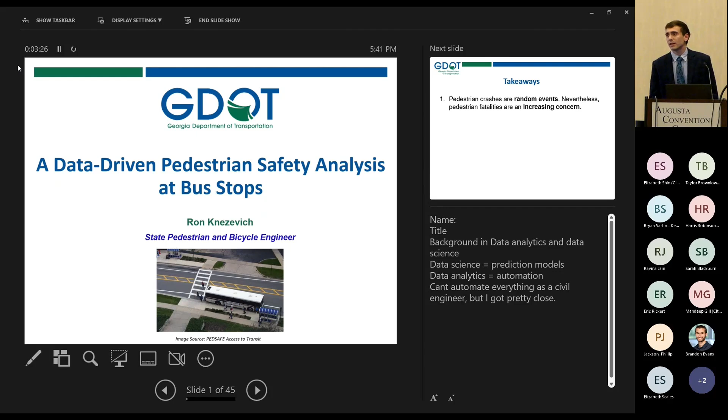All right. So I'm Ron. I'm the State Pedestrian and Bicycle Engineer at the Georgia Department of Transportation. As Raul said, a lot of my background's in data science and data analytics. What that means is I like to build prediction models, and I like to automate things. A lot of civil engineering decisions can't be fully automated. I'm hoping to show you today we can get pretty close to making a good decision. So I'm speaking on a data-driven pedestrian safety analysis at bus stops today.

I have 3 takeaways for you guys. One is pedestrian crashes are inherently random events, but those pedestrian fatalities are an increasing concern. 2 is proactive measures can be used to help justify systemic or network level safety projects. And 3, identifying project focus and the countermeasures you want to implement before conducting a network screening or system-wide approach can help expedite the safety process study.

So first I'll be going through some background. If you've seen some of my presentations in the past, you'll see some reused slides in this background on pedestrian safety, proactive safety, bus stop safety, as well as the safety management process. Then I'll be going through the study conducted on a pedestrian safety analysis for MARTA bus stops. Though this analysis was done with MARTA bus stops, we're hoping to do more with any bus stop network. So send me your data, you'll get a pretty good study coming out.

All right, so first into that background. Over the last 15 years, we have been seeing an increasing proportion of our pedestrian fatalities. Back in 2006, less than 10% of our roadway fatalities involved a pedestrian. That number is closer to 20% today. So if you've been in this industry for about 15 years or longer, pedestrian safety is more of a concern today than it was back then.

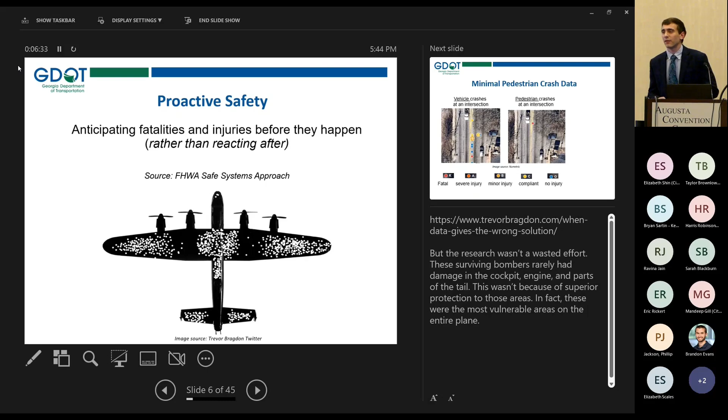So crash data, it's not bullet holes in the plane. There's a lot of holes in that metaphor there, but it's an illustration that we should be using more than just crash data to justify our safety improvements. And the reason for that, especially for those pedestrian and bicycle crashes, is I get an intersection like this all the time. It comes up.

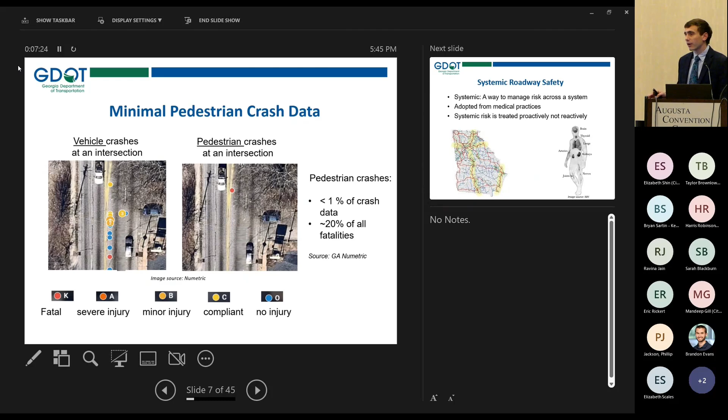You have a lot of vehicular crashes at that intersection. We have a lot of vehicular crash data that the safety program has stored up for years, a very robust database. But what you'll see here is tons of vehicle crashes, one pedestrian crash, and that one pedestrian crash is a fatality. We don't have the best pedestrian crash database. These things are often underreported and not reported. Sometimes people just walk them off. Pedestrian crashes make up less than 1% of all of our crash data, but almost 20% of our fatalities. So if you're only assessing crash data when making a pedestrian safety decision, you're doing it wrong.

Moving to systemic analysis, that often gets used interchangeably with proactive safety, but is not the same. Systemic safety is a way to manage risk across the system. It actually comes from the medical industry. So what you're seeing here is a slide from one of the classes I helped develop at Georgia Tech on systemic safety. So in medical practice, systemic risk is something like diabetes or Alzheimer's, things that affect the body as a whole, rather than an isolated cough or cold targeting a specific organ.

Systemic risk is diagnosed by assessing not just your symptoms or the crash data, but also diagnosing those underlying conditions, your family history, things such as that, or underlying risk factors you as a person may have. This is the same thing with roadway safety. We should not be just assessing the crash data on the roads, but also a variety of other factors such as lane number, traffic volume, intersection skew, etc.

Now onto bus stop safety. Why this study is focused on bus stops: in the Highway Safety Manual, it's identified as a risk factor. If you're familiar with crash modification factors, there's a CMF for bus stops in the Highway Safety Manual. This is because bus stops are locations where people tend to cross the road, whether it's at an intersection or not. So we're trying to make them safer in general.

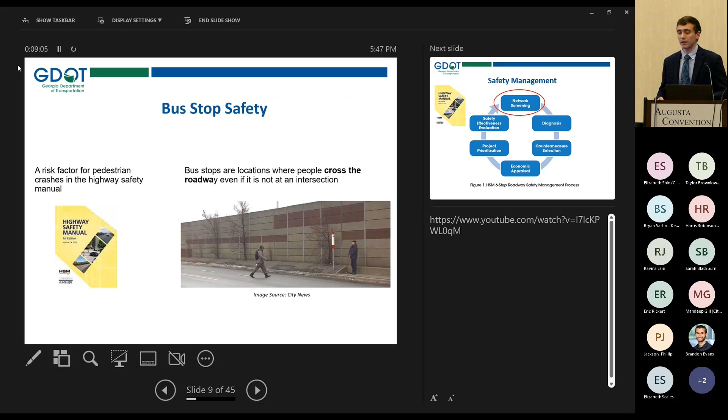Moving on to the highway safety management process. If you're a safety engineer, you should be familiar with this table. It's from the Highway Safety Manual. Our process works by conducting a network screening, finding those locations to implement safety projects, then diagnosing what that safety concern is, selecting a countermeasure, conducting an economic analysis, project prioritization, and then evaluating how you did.

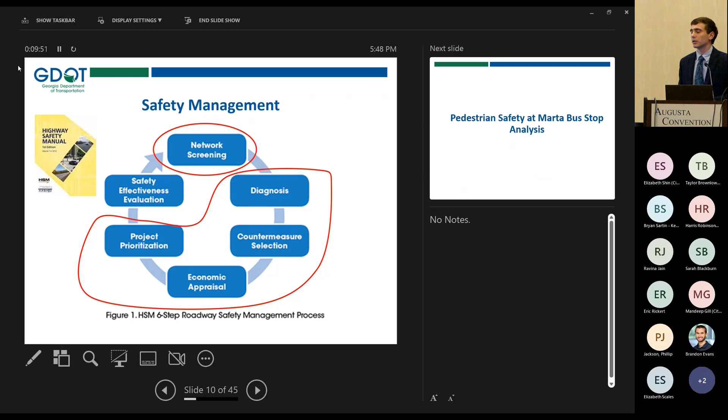Today, I'll be going through morphing all those circled in red into that network screening level. So preliminary network screening that conducts the diagnosis, countermeasures, economic analysis, and project prioritization. Very preliminary versions of all of those, but it gives us a good starting point. All right, now moving on to the study on pedestrian safety at MARTA bus stops. And as I said earlier, with this study, hopefully we can move on to other types of bus stop networks.

So first, establishing focus. When conducting a network screening, you want to isolate a crash type, a certain type of safety concern. Here we're doing bus stops, pedestrian crashes, or pedestrian safety in general, and mid-block or unsignalized intersections. For signalized intersections, we could have a whole project there as well, but that's a completely different type of countermeasure that you would implement than a mid-block crossing. So you really want two different types of projects, because what you're going to do to a signalized intersection is not the same as what you would do to a mid-block.

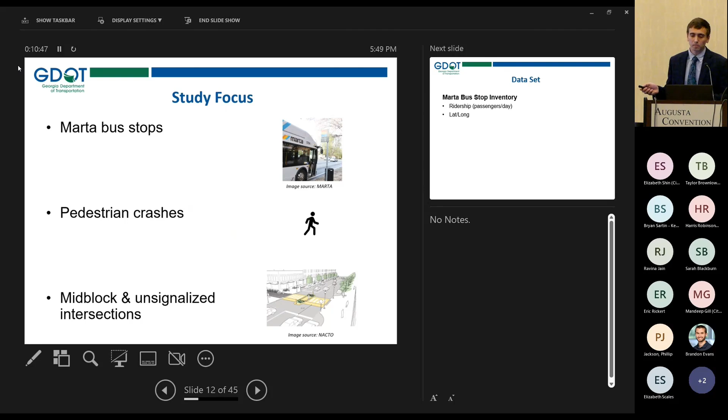All right, now into the data sets. For our MARTA bus stop data, what I used was the location as well as the ridership, or vehicles per day, or passengers per day.

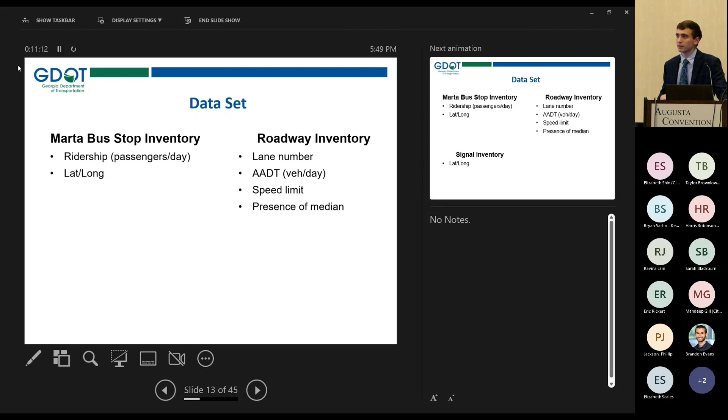The roadway inventory, GDOT has a robust data set of all of our roadway networks with lane number, traffic volume, speed limit, as well as the presence of a median or divided roadway. And the signal inventory, just so I could get rid of those bus stops that were at signal locations.

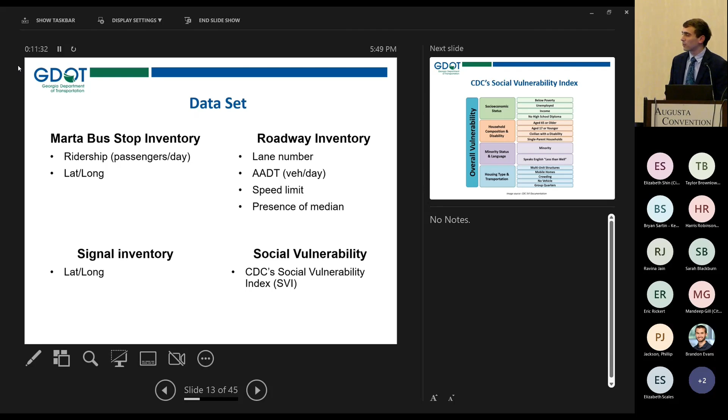And social vulnerability, or CDC's SVI, Social Vulnerability Index. If you've seen one of my presentations before, I bring this one up all the time. The CDC social vulnerability is an indicator of vulnerability of that population. It takes into account a variety of different demographic data, such as age, income level, race, and what was used particularly in this study is housing type and transportation. What this is, is access to transportation of those roadway users.

This one was particularly influential in the model discussed today because if you have lack of access to good transportation, you're probably using those MARTA bus stops or you're walking around. So this becomes a risk factor even more at these bus stops.

Now, how do we quantify that proactive safety? As a safety engineer, we want to quantify all of our decisions. We need a dollar value associated to everything. So that's where crash prediction comes in.

So I said earlier, I'm a data scientist. I love building prediction models. I'll build prediction models for all the regions here in the state. This is a pedestrian safety performance function, which is the term typically used. It's essentially an equation that combines a variety of risk factors and demographic data to predict pedestrian crashes.

The risk factors we're seeing here are ridership, those passengers per day, and the presence of an intersection. GDOT actually has a robust data set now, very recently developed on our platform Numetric, of the locations of all of our intersections in the state. It's not perfect. In Savannah, actually, a lot of those intersections are fairly close together, and it's a data challenge to separate out an intersection when they're only a couple of feet apart.

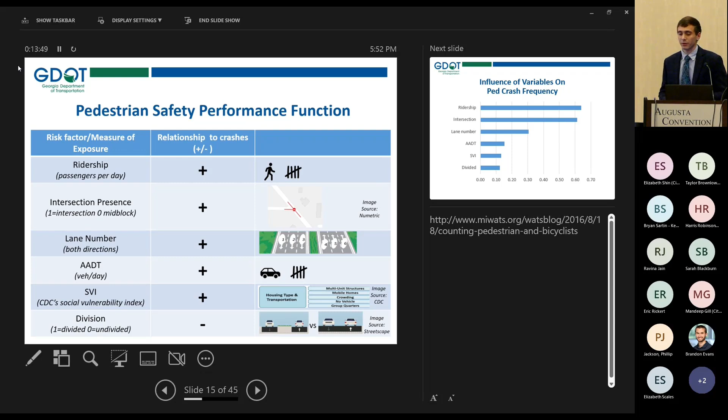Lane number, more lanes, more crashes. Traffic volume, higher traffic volume roadways, we're predicting more crashes. That social vulnerability, those more vulnerable populations are the locations where we have more pedestrian crashes. And roadway division, undivided roadways have more pedestrian crashes, or lack of a median.

All those variables are not influencing that equation or the model the same way. Ridership is the most influential variable, as it's a measure of exposure of how many pedestrians are actually walking by that bus stop per day. Then the presence of an intersection, more people are tending to cross at those intersections. Lane number, then followed by traffic volume, then social vulnerability, and then roadway division.

So what I went through was an equation on predicting crashes. I have an actual formula for that equation. It's a little too technical for this presentation today, though. But aside from predicting crashes, we want to predict crash severity too, which is a very different thing.

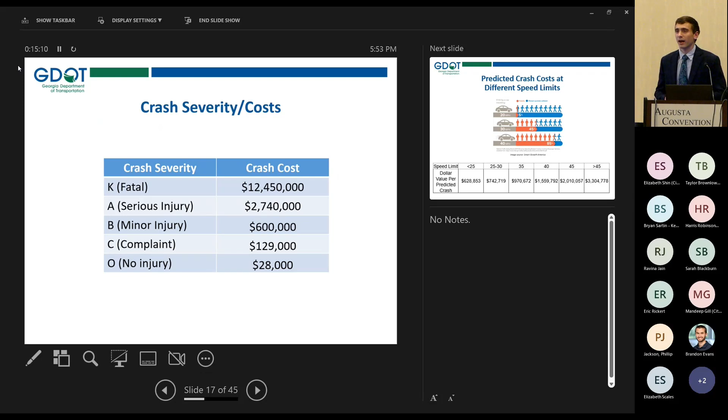GDOT has these various crash costs for all of our different severity levels of crashes. These have been updated for adjustments in inflation, so you might be using older crash costs. Just like our construction costs have gone up in the last couple of years, so have our crash costs. So if you've ever wondered what the value of a human life is in traffic engineering, it's about $12.5 million. This is how we quantify where to put different safety projects.

So on our various roadways, though, higher speed roadways have more severe pedestrian crashes. We're not seeing more pedestrian crashes on our higher speed roadways, but those crashes that happen are much more severe. So what this table shows is that the higher the speed roadway, the higher that dollar value is for those pedestrian crashes, and this is derived from our own data.

Over 45 mile per hour roadways, we have a dollar value of about 3 million, while under 25 mile per hour roadways, those pedestrian crashes are only worth about 600,000.

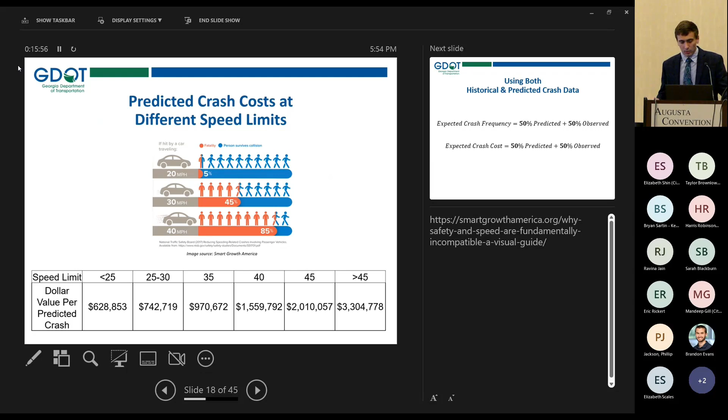So we just predicted crashes, we predicted severity. Moving on to combining that data with our observed crash history. Highway safety engineers use a term called expected crash frequency. There's a lot of methods in the highway safety manual on how to calculate that. But what we're recommending at this point in time is to weigh 50% predicted crashes from that risk-based model, as well as 50% just from what's actually going on the roadway.

What are those pedestrian crashes actually there? So you can gauge both proactively and reactively, so we're not just ignoring locations where crashes are happening. Same thing with crash costs as well, predicting both crashes and crash cost.

That was my prediction model. Now moving on to the treatment selection.

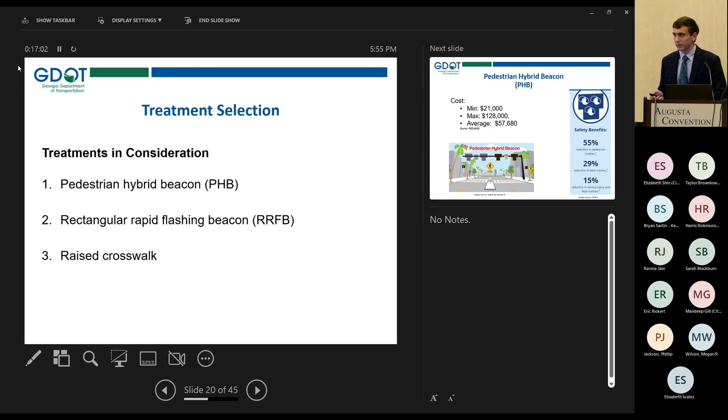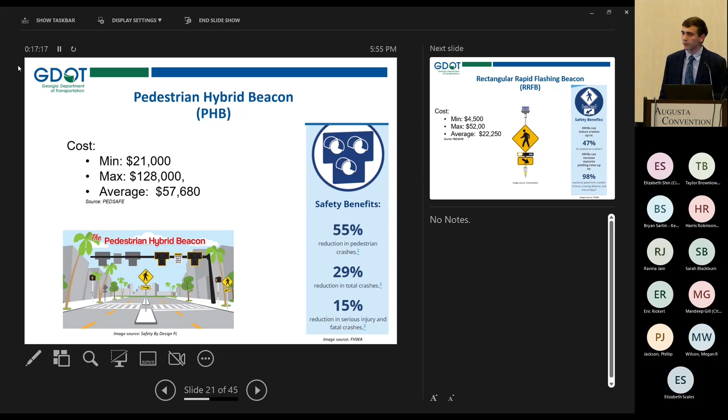Three types of countermeasures were used in the study to be implemented on this network level: pedestrian hybrid beacons, rectangular rapid flashing beacons (RRFBs), and a raised crosswalk. Pedestrian hybrid beacons have a crash reduction for pedestrians of about 55%, but they also reduce vehicle crashes too. Their cost is approximately $60,000, a little higher including professional engineering.

Rectangular rapid flashing beacons reduce crashes a little bit less, but they're a cheaper countermeasure. They also have a very high increase in yielding rates, about 98% increase in the amount of vehicles that yield to pedestrians at crosswalks.

Then we have a raised crosswalk, a cheaper countermeasure in most scenarios, with a 45% reduction in pedestrian crashes. But what's different about this is it's not applicable on all types of roadways. These three countermeasures are not always applicable.

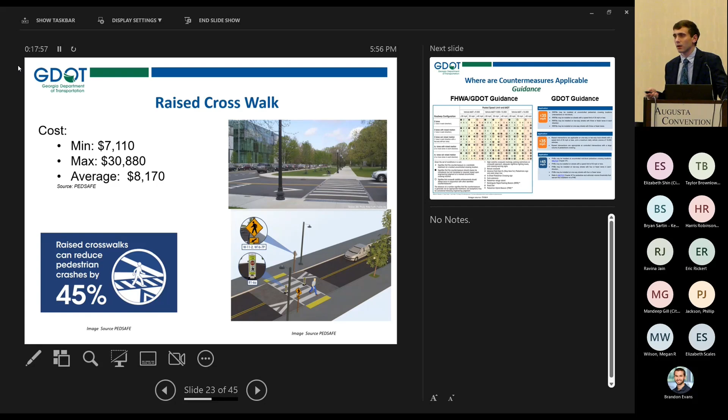We have guidance from FHWA, guidance from GDOT in our pedestrian streetscape guide on where we should be putting these types of countermeasures. We also have guidance from the MUTCD. Yes, I say guidance from the MUTCD, not warrants. That is the biggest comment I give in my traffic engineering studies. There is no PHB warrant, it is PHB guidance.

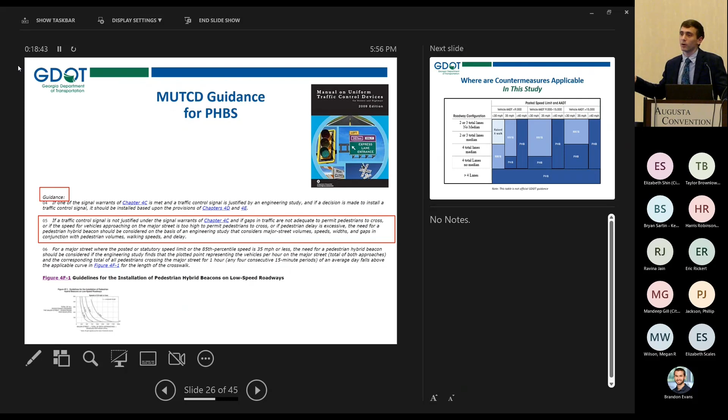What is often referenced is only the volume warrants, vehicle volume versus pedestrian volume. It is not a warrant, first of all, it's guidance. There's also another section of that guidance on safety, just as important as those volumes. You should be considering safety for what type of crossing you're recommending, not just volumes when programming PHBs or RRFBs. What it says in the MUTCD is consider gaps for those pedestrians, the speed of the roadway, the crossing distance, etc. That goes back to our table in the pedestrian streetscape guide and our guidance provided there.

Using all of that guidance, I formulated this table here just for the purposes of this study. The tables in our guidance are a little bit more flexible. This one gives a conservative decision on what the best type of countermeasure should be. So you see, as lane number goes up, as traffic volume goes up, and as speed goes up, we're implementing a more expensive countermeasure that's going to reduce crashes more effectively. Those pedestrian hybrid beacons are going to be the most visible on a higher speed roadway. You can see a raised crosswalk is only applicable on those low volume, low speed, low lane number roadways.

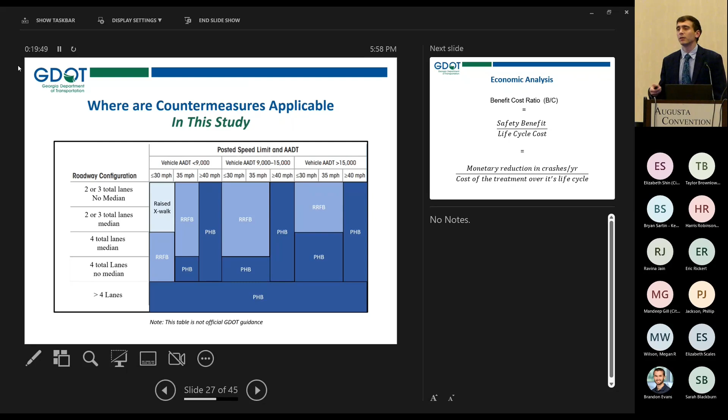All right, so now we've decided what type of countermeasures we're implementing. Economic analysis, or our benefit cost ratio, is how we do economic analysis in the safety program at GDOT. If you're a roadway designer in this meeting and you don't know what a benefit cost ratio is for safety, if you're working on a safety project, this should be calculated.

If we go below a BC of 1, or often below a BC of 2, we lose funding for that project. So you need to be recalculating that benefit cost ratio if you're changing project costs, because that will end the project entirely if you make it too expensive, which happens quite often.

That is the safety benefit over the life cycle cost of a project, which is the monetary reduction in crashes per year. Those crash costs I gave, multiplied by the crash reduction factor, over the cost of that treatment over its life cycle. So not just the cost, but some treatments last for 20 years, some last for 10 years. I can provide equations for this, they're actually in slides at the end later, with more formulas for how to calculate that BC ratio.

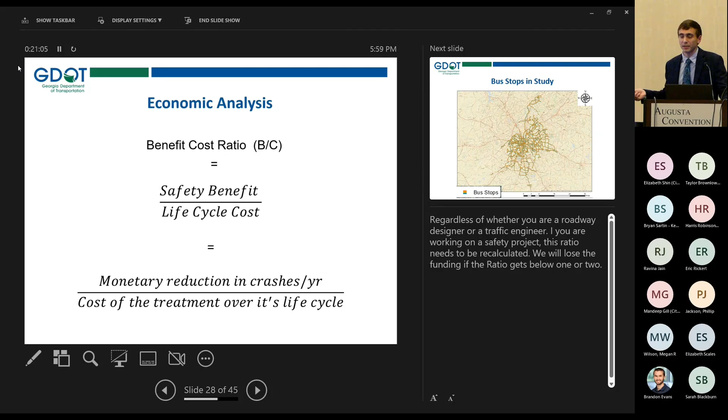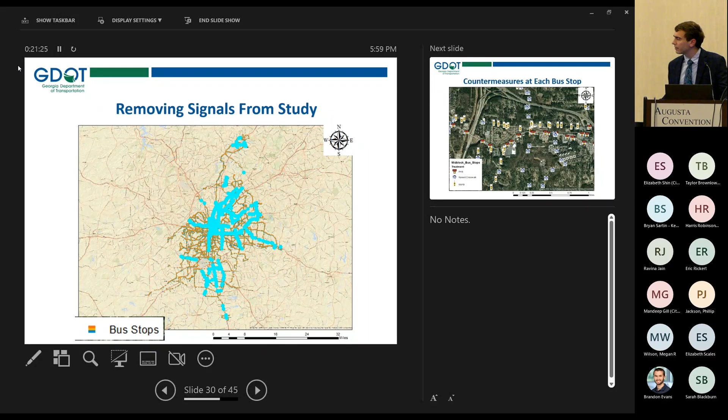All right, now to some of the good stuff: the bus stop study actually conducted. So as I said, we started with all the MARTA bus stops, removed the signalized ones, the bus stops at signals - still working on getting a better signalized database. I noticed we were missing some.

And then recommending that countermeasure at all of them. So this is not where we're actually proposing a project, this is what was recommended from that table I proposed. So what you'll see is on those higher speed, higher volume roadways, we're seeing PHBs, we're seeing RRFBs on those minor arterials, and raised crosswalks on those side streets.

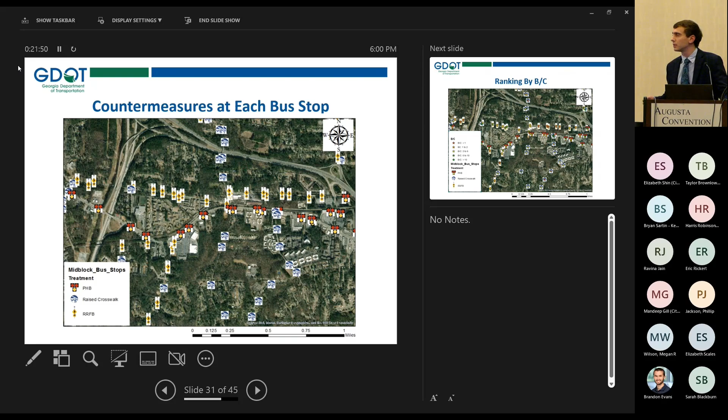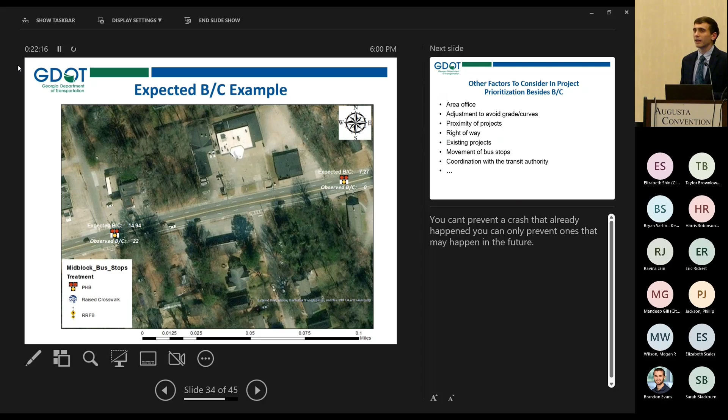We can rank those by the benefit cost ratio to try and narrow our scope, and filter to just the ones where we have a very high benefit cost ratio. In the safety program, we have to prioritize our funding just in those locations where we get that highest benefit cost ratio. To show an example, we're not using an observed benefit cost ratio, we're calculating this expected benefit cost ratio, which is a proactive ratio.

I see two intersections here. Don't get too hung up on the locations of these two crossings. These are just two bus stops, but they're about 400 feet apart. What you're seeing is one where, if we were to use our historical benefit cost ratio with only the crash data, we have a 0. But once we use that predictive approach and the proactive measures, we now have an economically feasible project of around 7.

In the other crossing, we see an observed benefit cost ratio of 22, meaning there was some crash data here. Then a pedestrian hybrid beacon was justified, but it lowered a bit to about 14 or 15, as you're seeing there. So what that proactive approach is doing, and that systemic approach, is kind of spreading out that benefit cost ratio, not just at locations where the crashes are happening, but where they could happen.

We're not trying to prevent crashes that already happened. We're trying to prevent crashes that will happen in the future. We're trying to prevent ones that could happen. And that location right next to it, with all the same risk factors, is nearly as likely to have a crash in the future.

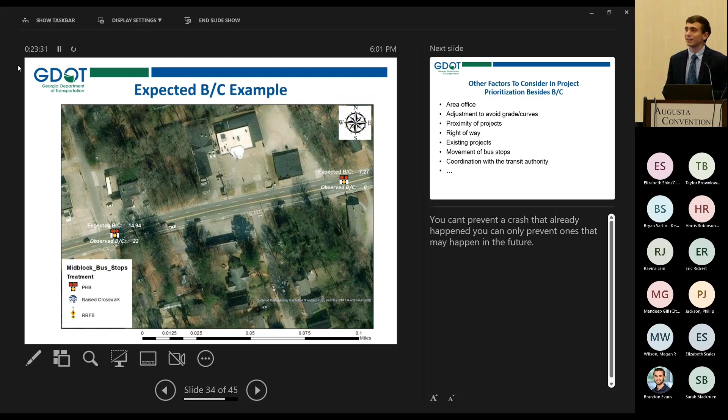So I went through that whole approach. There's a lot more to consider. We're still working on narrowing down what projects we're actually going to implement. There's things like, how do we group these projects by area office? We want to avoid curvature or grade. We want to combine projects based on proximity. Consider right-of-way — do some projects where we don't have to purchase right-of-way, because that can be a lot quicker process, and some projects where we do have to purchase right-of-way. We want to move some of the bus stops, and of course we'll want to talk and coordinate with MARTA on this project, as well as any other transit authority.

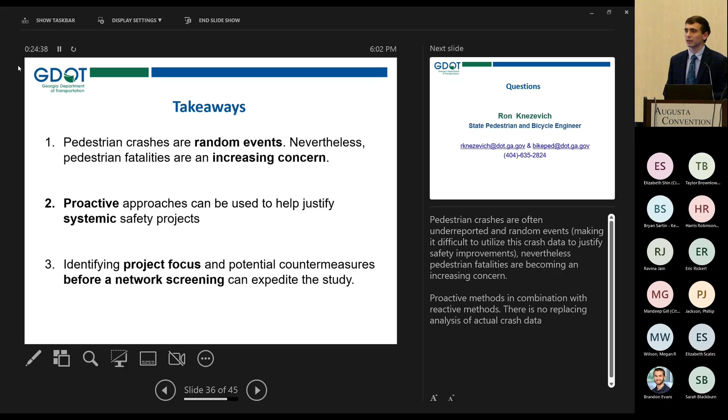So again, my three takeaways: pedestrian crashes are inherently random events, but nevertheless those fatalities are an increasing concern. Proactive approaches, as shown today, can be used to help justify a systemic safety project, and identifying that project focus and potential countermeasures before a network screening can help expedite that process and make a quicker selection of those countermeasures from the get-go. So thank you very much.

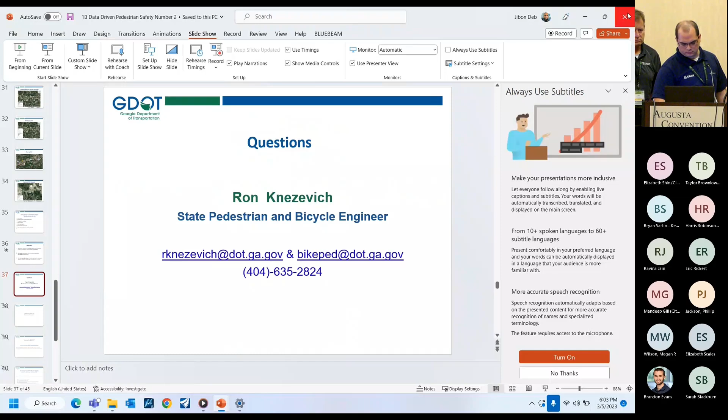All right, appreciate everybody hanging out with us tonight. I know Eric and I are in between dinner and a few cocktails here in a bit, so we're running late, so we'll try to go as quick as we can.

As mentioned, my name is Chris Rideout. This is Eric Brisse. We're with Croy Engineering. We're going to talk about the Windy Hill project today. Real fast, always got to talk about Croy for a second — about 120 people, based out of Marietta, Georgia. We also have offices in Chattanooga and Huntsville, Alabama. Been around for about 18 years, so good while now. We do everything — transportation, traffic, survey, land acquisition, aviation — so we do a little bit of everything.

So we're going to talk about Windy Hill today, and we're going to talk about connectivity, constructability, cost, and utilities. And it's all going to come back to this: it's a major project through Smyrna. But the goal is to get the vehicles through while keeping the pedestrians and bicyclists, and getting them more connected than they ever have been.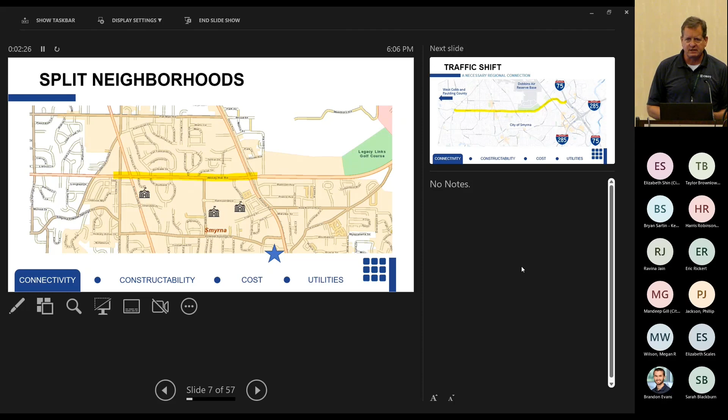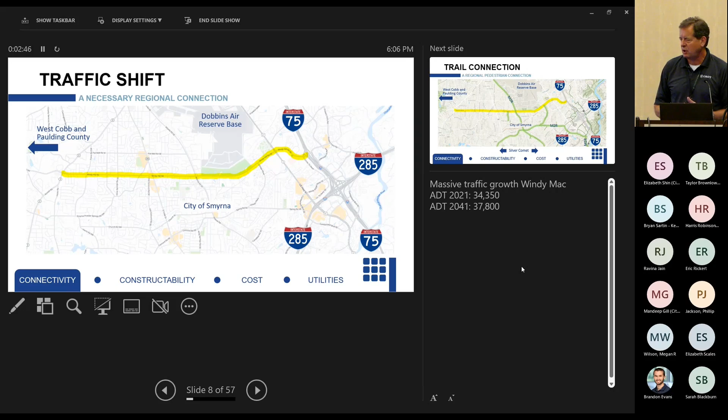The city really wanted to do something to improve it. Overall, it's the big picture. Windy Hill basically goes from Austell Road to I-75. It's a long corridor, a little over 5 miles long. Trying to improve the whole thing is hard to do funding-wise. So the city looked at, and sorry, forgot this little piece.

We're also working to connect all the trails in the area from the Mountain to River Trail. There's Village Parkway Trail, and all that connects to the Silver Comet Trail to the south. So this project will help improve all of that.

Like I mentioned, the original project was a very large scale, multi-phase project. We originally went after some funding from the state, but it's not a state route, so that was a no-go. Eventually the city of Smyrna stepped up. They funded pretty much half the project, with Cobb County funding the other half through the Cobb County SPLOST program.

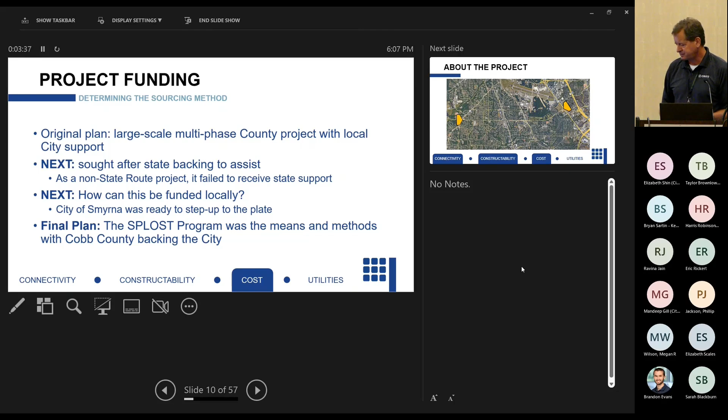Here's the original corridor that's been looked at, from I-75 all the way to Austell Road. And then this is our section right here, basically from South Cobb Drive to Atlanta Road.

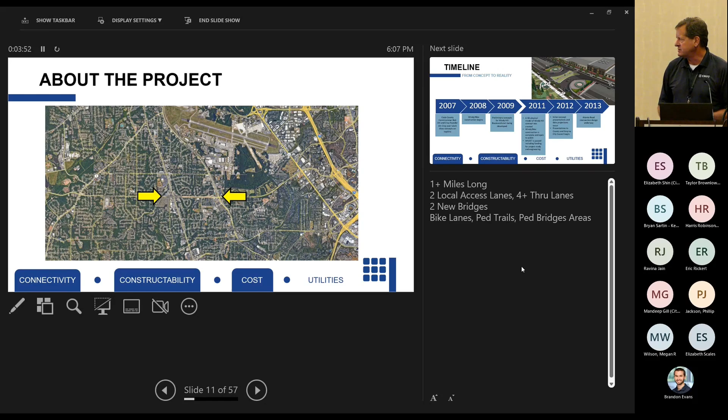I'm not going to bore you with the overall timeline, but one thing I wanted to point out is the project's been going on for a while. Back in 2007, our founder Mr. Croy sat down with one of the commissioners, Bob Ott, on the back of a napkin and said, hey, we know there are projects coming that are going to make Windy Hill even more congested. What can we do? One of those big projects was the Windy Mac project. If you're familiar with West Cobb, you're very familiar with this project. It started construction in 2009, opened I think in 2011 or '12.

It basically took all of Paulding County, West Cobb, put them on Windy Hill Road, and it made what was already bad congestion twice as much. I think the design year number we're dealing with is 37,000 ADT. So, like I said, it started in 2007. Here in 2023, we're halfway through construction. We'll get to see a little bit of that in a minute.

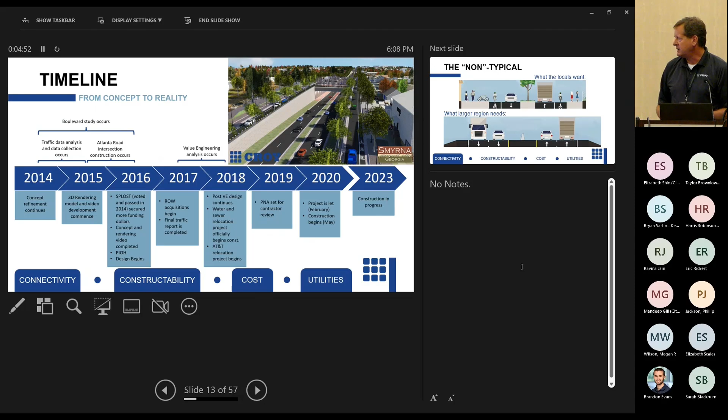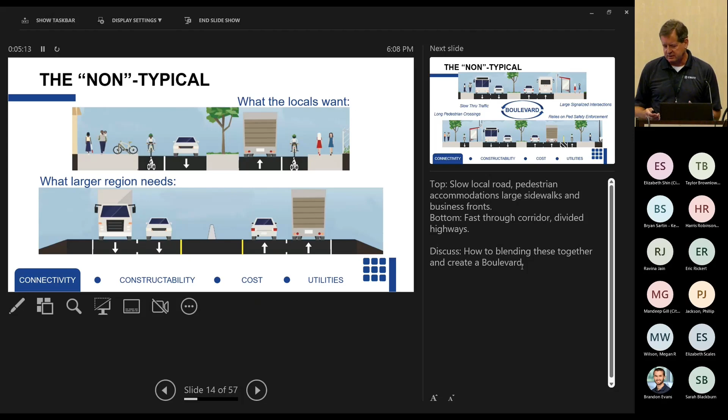So what was our goal here? Our goal is to move the vehicles through Smyrna efficiently while maintaining and adding to our pedestrian and bicycle, family so to speak. The citizens want bike lanes, wide sidewalks, and areas for BRT and whatnot. The challenge with getting all that in is that you really slow down traffic with your crosswalks, the long pedestrian crossings, and the signalized timing and that kind of stuff. So we really tried to come up with a mix that would solve all of those issues.

So we started thinking outside the box. What you see here is a roundabout sitting on top of express lanes in Barcelona, Spain. That was kind of our initial inspiration for this project. It's not something you would normally see, but we're starting to see more of them in the region and the nation. This was one of our first concepts in the project. The goal is to move the traffic while also keeping the pedestrians and bicyclists happy, connected between the north and south of Windy Hill Road.

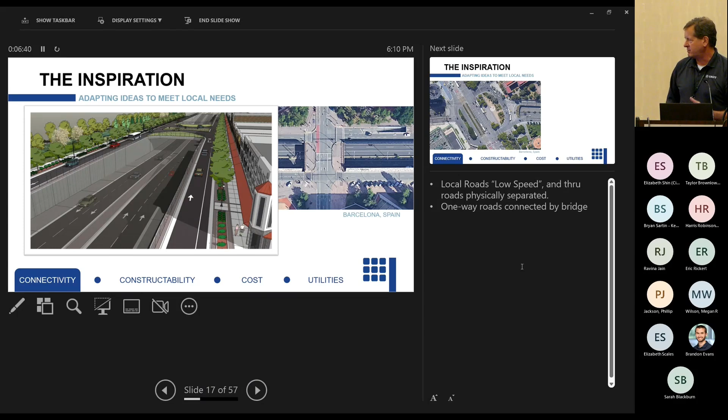This is another picture of that same roadway. You can see the bridge structures going over the express lanes, one-way road in each direction. This is one of our original SketchUps, which shows what we visualized for Windy Hill, even with some development on the south side.

This is another one where if you zoom in, this is almost identical to what we're going to end up with when our project is complete. We have one-way traffic with turnarounds and with the express lanes going underneath. So once again, we're trying to keep those pedestrians in mind at every step of the way in this project.

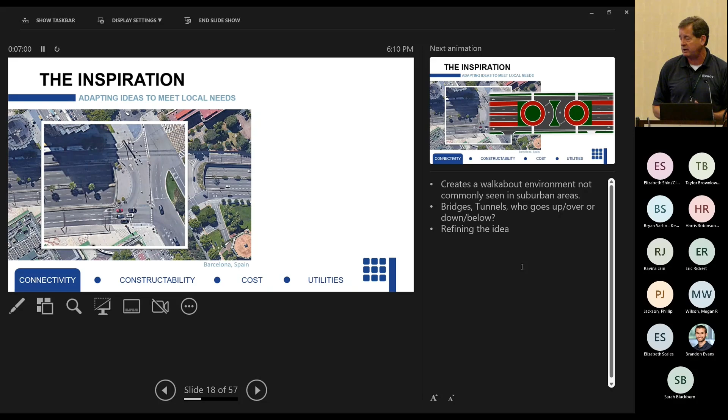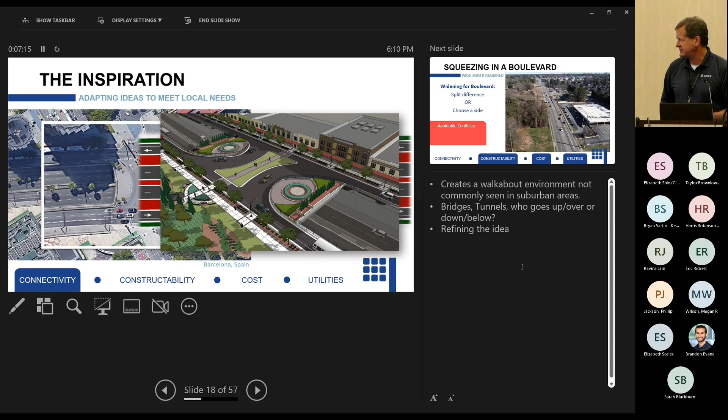Once again, there's our concept. This is where we started getting into some renderings. At this point, we've got the ideas, and then we're trying to figure out how to really express those ideas. We had some challenges on this project. We've got a 5-lane section, heavy commercial. So where do you put the road?

Turns out we also have a post office on the south side. We know what it's like to touch a federal building, so that was a no-go. We also have transmission lines along the south side, and we know how expensive those are to move. So going to the south was not an option.

There's also a barbecue joint that we were told no, do not touch. So it made the whole decision to go north easy. When I say easy, it wasn't easy, but that was an obvious decision. So you can see here, this is one of our original concepts where we show everything shifting to the north.

One of the advantages of what we've come up with is we've got 2 lanes, 1 lane each direction for the local access. And then we allow them at numerous locations to do turnarounds. So no matter where you are, once you get on the local access in either direction, you have an opportunity to get anywhere you want along this corridor. You just go up and we've got 2 bridges, they're almost like roundabouts, perfect U-turn movements, and everything accommodates both bicycles and pedestrians.

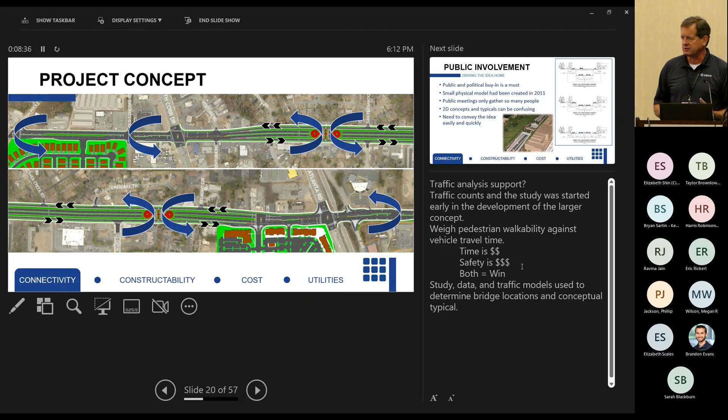This is where the public involvement, this is where we really had to get buy-in. This is a massive project for the city of Smyrna, the largest one they've ever undertaken. So we really had to get buy-in from the public. So we had numerous public meetings. We created a model, an actual replica of the project, that we carried around in the back of our car to all these public meetings. It was a 3D scale model of the project.

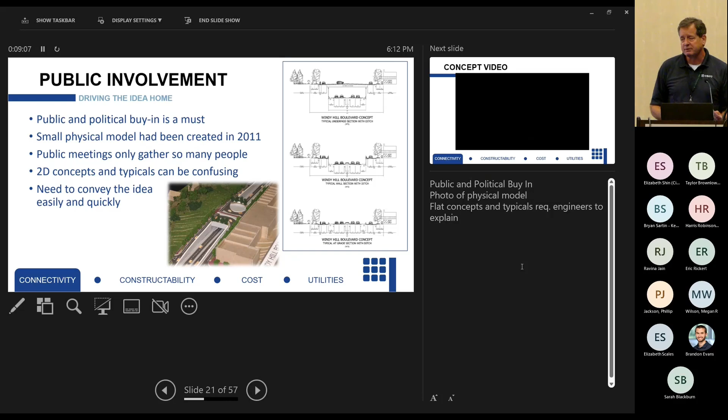But even that, it helped, but you had to keep going a little bit further. So we created a 3D rendering of the project, and we were able to film it or render it. This is where Eric's going to come in. So what we did is we presented this on a loop at all our public meetings. I'm going to show it real briefly, and I'm going to let Eric get into a little bit of the detail of the overall project and the design. We did this 7 years ago, give or take.

Yep. So here we're heading eastbound on Windy Hill, coming across South Cobb Drive. And if you know the area, you drop down. And if you want to go on the local access, you pull off to the right. You've got access to the barbecue joint right there. Moving on, and this is what we call our West Bridge. So you see the local express lanes going underneath, and then you've got the local access above. Those are pedestrian parks, crossovers, and some other cool features that Eric's going to mention.

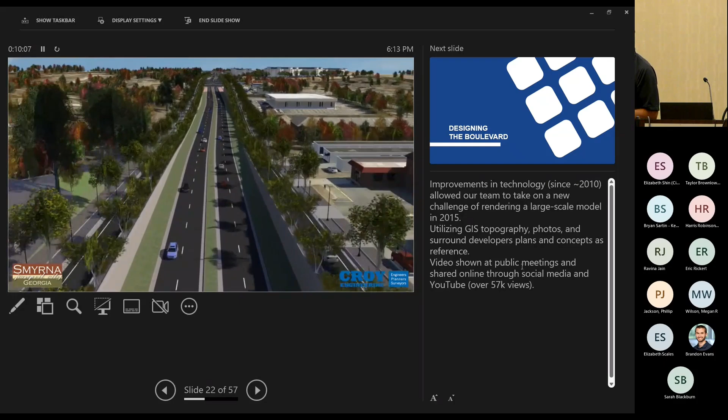We kept this on a loop during the public meeting. Sorry, I stepped away from the podium.

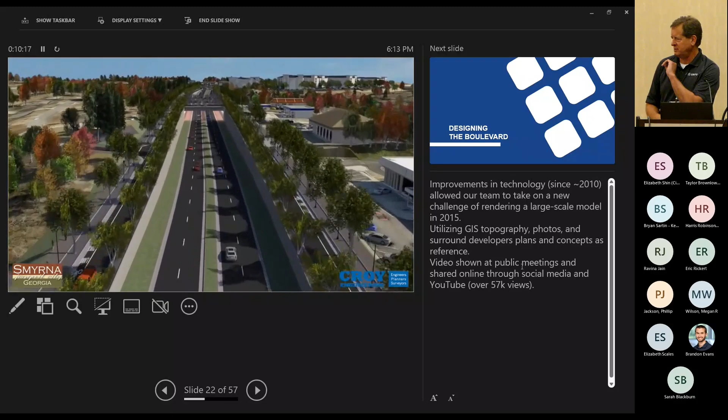And this was huge. When the public saw this, they could really envision it. This is exactly what is being built today, with a few exceptions. So this was huge. I know this was 7 years ago, and with technology now, we've all seen even more incredible renderings like this out there. So these buildings, this is exactly what's out there right now, building-wise.

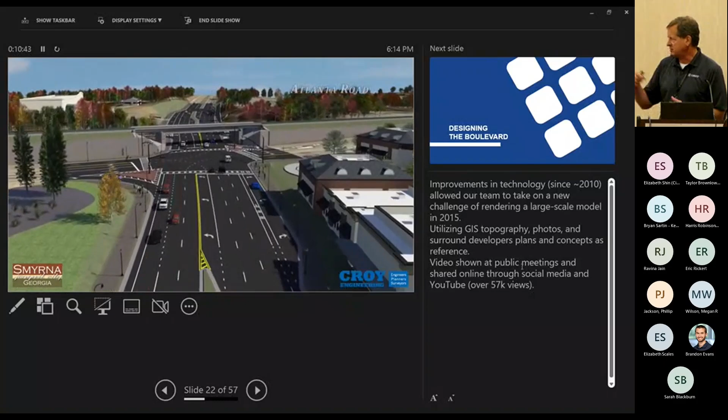Parks on the north side. That's Atlanta Road and the railroad right there. So that was huge in getting the point across to the public so they could visualize what was happening. So that's my spiel. I'm gonna let Eric talk a little bit about how we got to where we are today.

Thank you, Chris. Some of the other parts of that video that we cut out for time today had a first person view of the vehicle going down the through lanes. That way people understood, all right, this is how I'm going to connect here. We also follow along a vehicle on the local access roads and give them a little view of what it'll be like when they actually make the U-turns on the bridges.

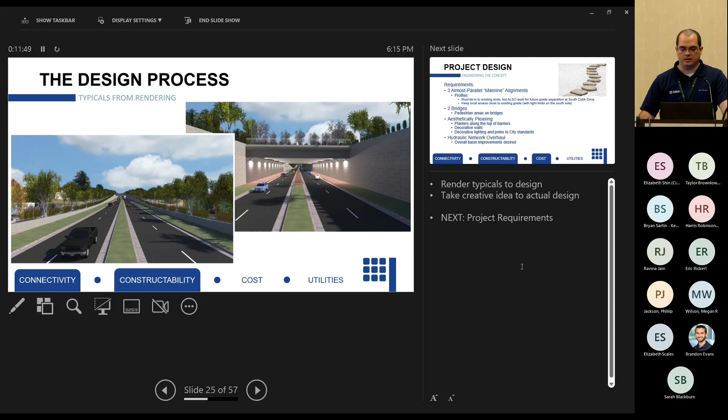So taking the rendered model, now we got to move into the design phase. Some benefits of that rendering was we could already kind of see our typicals that we were going to build it out of. On the left here, you can see the local access and the through lanes are at the same grade, and going under the bridges, or sometimes we refer to them as tunnels, on the right.

So Chris mentioned, and I'm going to call it a stepping stone project. There's a lot of different projects going on along this windy hill from 75 all the way to West Cobb. Many of these projects are still in the works and won't happen for years from now. So I call this a stepping stone project, but things we had to keep in mind were we don't want to create issues for those future projects. For example, our through lanes, our centerline profile, that profile needed to work with a potential grade separation at South Cobb Drive in the future.

Essentially, this project has 3 parallel main lines. You got your local access, one on the north, one on the south, and you got your through lanes. We have 2 bridges that Chris has mentioned. Those bridges needed to have pedestrian areas. That was a goal of the city. What can we do to connect that north side back down?

Of course, the city wants it to be aesthetically pleasing. So, we're talking planters along the major walls, planters on the bridges. They didn't want that highway feel. They don't want a flat concrete wall. And then obviously lighting, decorative poles. You get the idea. Some of the overall basin improvements hydraulically were also able to be incorporated into this project. We're not going to get into that today, but there were some really good benefits that worked out for the region.

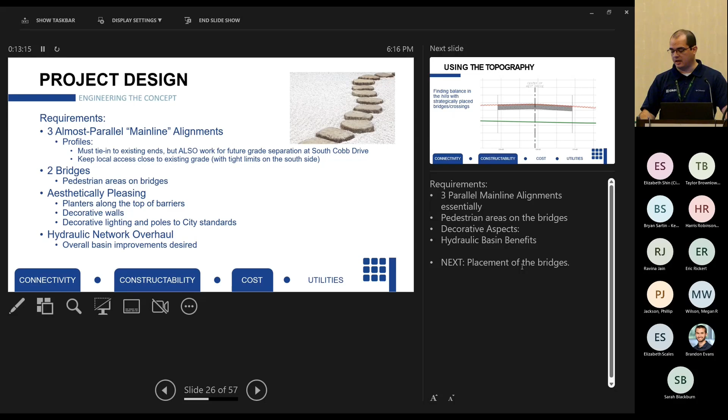Using the topography, for example, that western bridge is at a high point in the hills. So the local access lanes, particularly the southern side, needed to really match closely to existing grade. We were able to use that to our benefit and just kind of cut through the hill. You can see here how the one-way roads are going to utilize the bridges. Essentially, these bridges are acting like roundabouts at the end of a divided highway. Keep that in mind. The bridges also will keep all pedestrians and bike traffic off the through lanes. These are slower roads, 25 miles per hour.

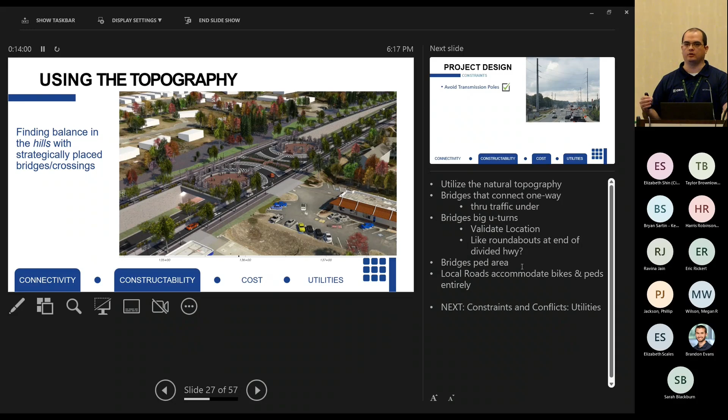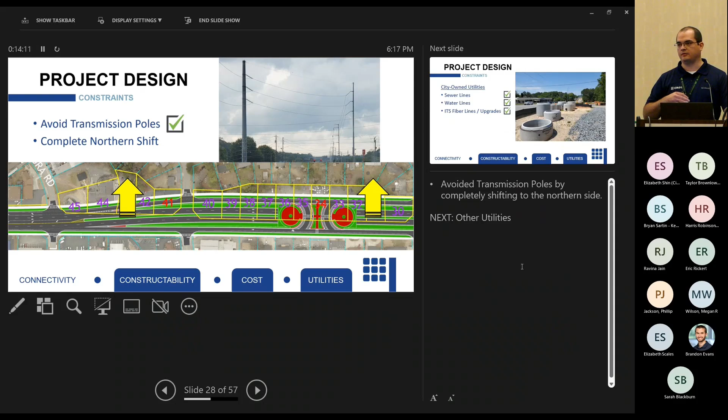Some of the constraints Chris has already mentioned, the transmission poles, we know about that. So we were shifting to the north, a lot of total acquisitions of those properties on the north side. Some of the major other utilities, the city owns the water and the sewer out there. Included in our project was the ITS and fiber line upgrades to connect some of their signals on either end. The water system had to be split, and the sewer we were mainly able to keep to the southern side with some key connections. To keep things moving very quickly, we actually broke water and sewer and all the relocation efforts out as a separate project, and we were able to bid that out early and get it under construction almost a year early.

So as we were driving along, some of us might notice some of these familiar, really old Southern Bell manholes. Those look familiar. They're really big and really heavy if you've ever tried to open one. Unfortunately, along our northern edge of existing pavement, there was an AT&T duct bank. So we avoided the transmission poles, but now we got to hit this. Our center line for the through lanes was almost right on top of this. So early coordination with AT&T. In 2017, we started talking to them immediately, had a lot of meetings, worked with them on redesigning it to relocate it to the southern side.

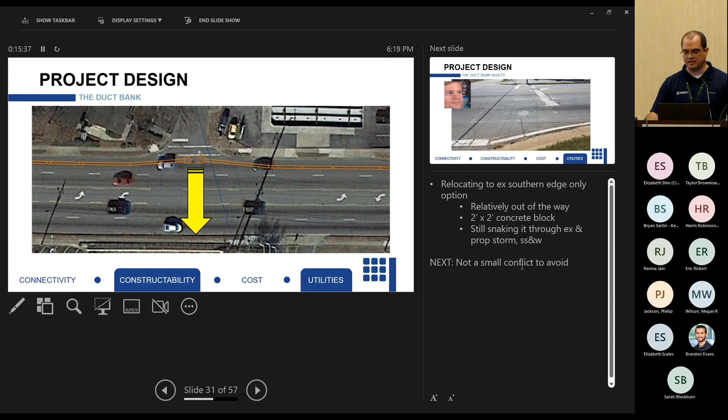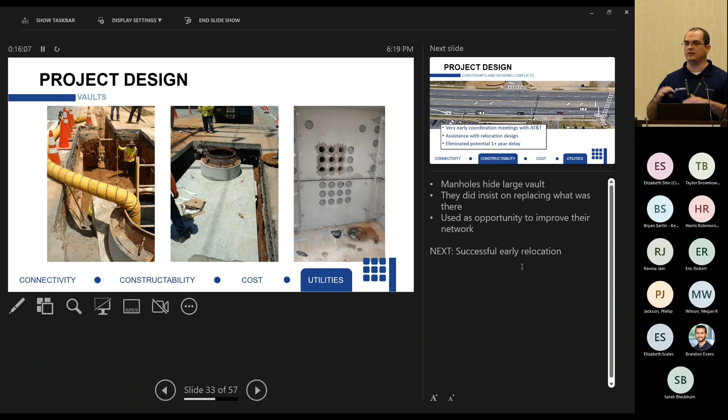So overall, in the end, early coordination, as I mentioned, worked with AT&T, helped them with the redesign effort to speed that along, and gave them a super early notice to proceed. They were the first utility out of the way. And in the end, we think this probably eliminated about a year of delays.

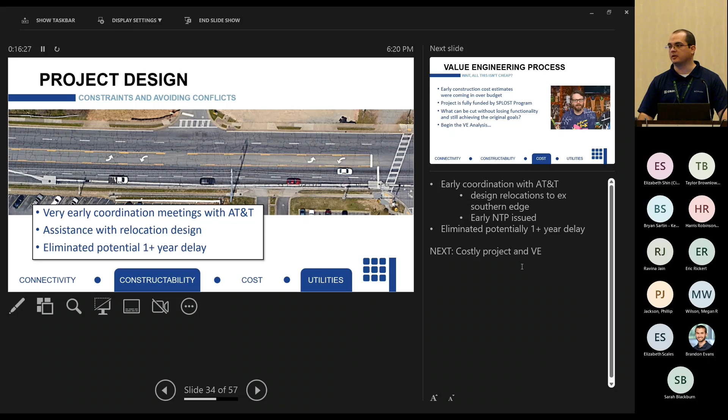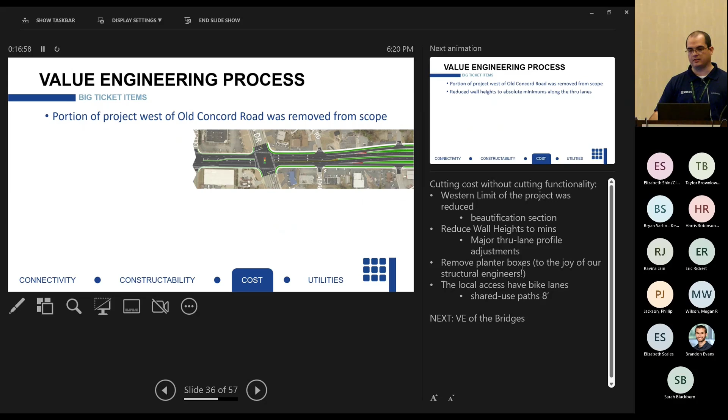So moving on, we're getting through preliminary design, and guess what? Early cost estimates are coming in very high. As a reminder, it's a SPLOST project, so we have a strict budget. So what can we lose without cutting some of that functionality? All right, value engineering. We all had to go through this before. What can we remove? First thing was this section over here, west of Old Concord Road, was basically a beautification. That was an easy thing to cut out.

Next, we reduced our major wall heights. We did this by some very creative through lane profile adjustments. Early on, we had kind of a constant slope of one low point, right? Now it's a lot more vertical hills. Next, the planter boxes along the top of the major walls. That was a big one. We cut those out to the joy of our structural engineers. They were very concerned about draining planter boxes right behind a structural wall.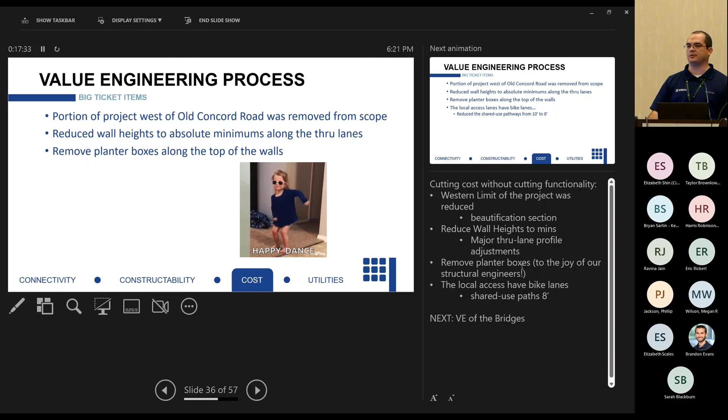Next, the local access lanes, as we mentioned, already have bike lanes. Well, putting in a bike lane parallel to a shared use lane, that seems a little redundant, so we reduced from 10 foot down to 8 foot. The big cost item, of course, is the bridges. How do we save some money on these bridges? So, all right, let's get the beam shorter. We can get the beam shorter by adjusting our typical and our through lane. Let's narrow that down a little bit. We did have to analyze to make sure that wasn't going to restrict future opportunities in the lanes that go through this section. Don't want to tie anyone's hands.

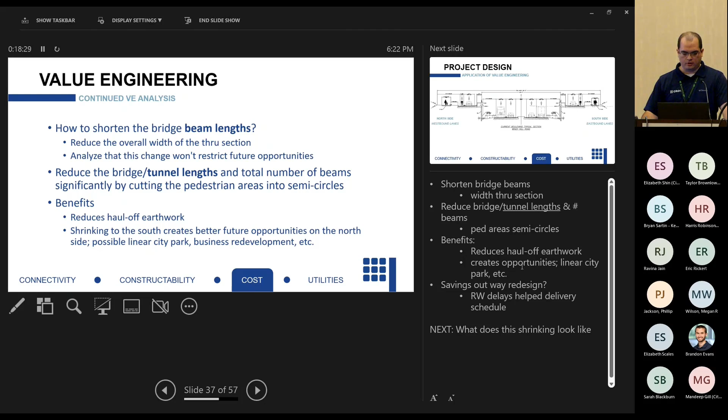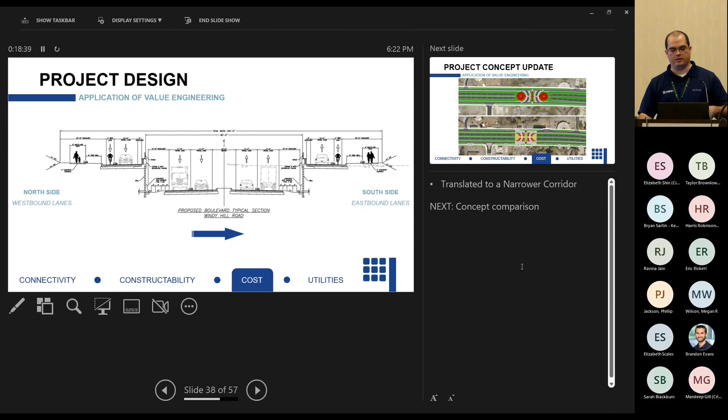Much smaller bridges, but that extra area on the north, you know, there's opportunities there for possible business redevelopment. There's also a high chance that the city's going to combine some land and make a nice linear park. So went through the big value engineering. I should mention that actually our estimates there was that it cut about $4 million off the project.

So once we got through that, we had to continue our public involvement, right? We've changed from the original picture, that original video. We did not want to spend the time to remake all that. So we came up with what you see on the screen here. These are some new renders, but they were stills. Still get the point across, and this is almost identical to what the final product was.

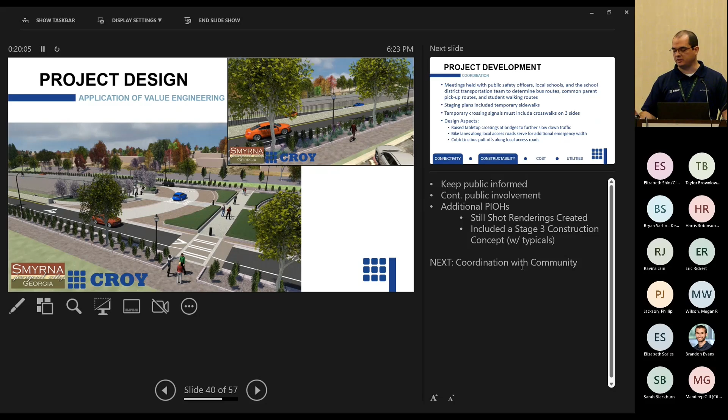The other thing that was a little unique that we took to these new open houses was we have 5 stages of construction on this project. We took a concept version of stage 3, which is what we sometimes call the big dig stage. It showed temporary signals, and it really drove home for all the residents and business owners that no matter what, throughout construction, they were still going to be connected. They were not going to lose the abilities they currently had, but they were going to still have access to their schools, their homes, and their businesses.

Throughout design of the project, we continually had meetings with public safety officers. We met with them to ensure that GIS would get updated during construction. Got to make sure that fire truck gets there in time. We met with the schools, with the county transportation group for the schools. We talked about bus routes, pedestrian walking routes, where the high schoolers are walking, how are they crossing, even parent pickup routes. Coordination was necessary and a must here. It was very beneficial in how we plan things out. All the temporary and staging plans included temporary sidewalks.

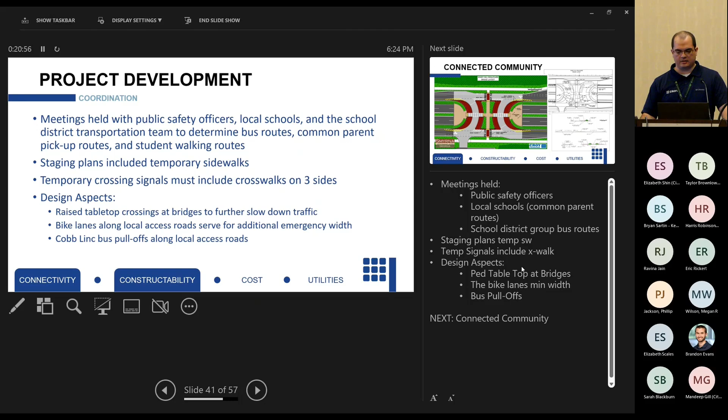The temporary signals I talked about, they had to, on 3 sides at minimum, have crosswalks. Some of the design aspects that really drive home a lot of these features that you can see here, screen's not great. So one-way roads. Remember, pedestrians used to be crossing 5 lanes. Now they're crossing 1 low-speed lane.

We put in some raised tabletop pedestrian crossings. There's RRFBs at every one of these crossings on each bridge. We still got the benefit of the pedestrian areas where we can hang out, have some benches, trash cans. There are planter boxes on the bridges, separating those pedestrians from the traffic.

Along the local access, some of the other connectivity with the pedestrians would be the bus stops. Our corridor had 4 bus stops. Where we're down to the 1 lane local access, we actually have pull-offs. So that bus gets entirely off the lane and traffic can keep moving.

Wrapping up real quickly here, we talked about early notice to proceed for utilities, water, sewer, AT&T. Got them out of the way. We worked with contractors to have some early reviews. We did a PNA set that went out to all of them. In the end, the total right-of-way costs on this project was $21.4 million.

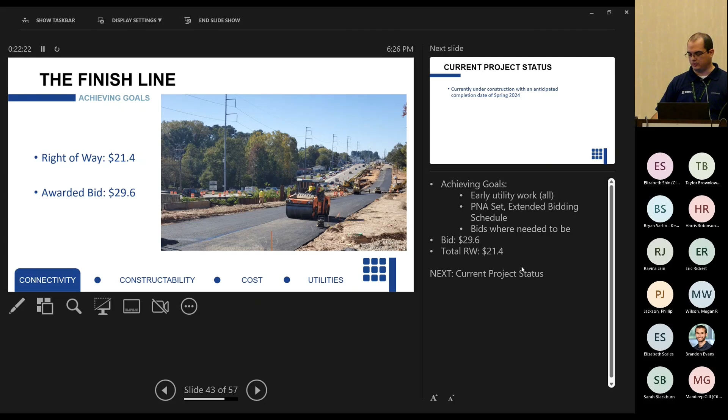Bids came exactly, well, not exactly, but there's no exact ever on bids. But they were right within the budget limits that we needed it to be. So the awarded bid cost was $29.6 million. Currently, the project is under construction and we're anticipating completion date in spring 2024.

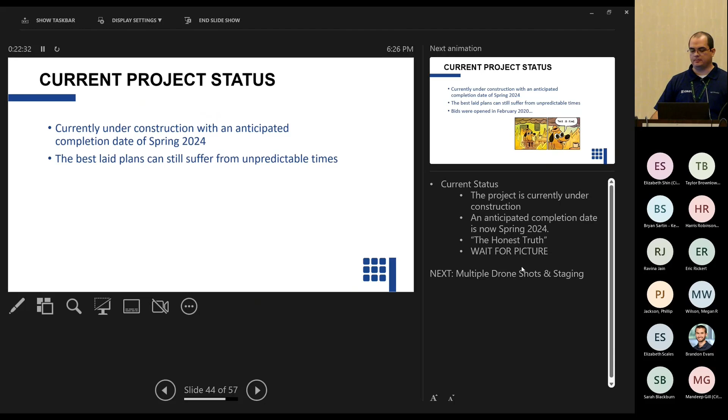I will say the best laid plans still suffer from unpredictable times. The bids were opened in February 2020. We all kind of know what happened shortly after that. By the time notice to proceed was given, all the contract docs were done. Contractor was given notice to proceed in May 2020. So we are living in a different world nowadays. Huge price escalations, problems just keeping enough people working, hiring enough people to do the work.

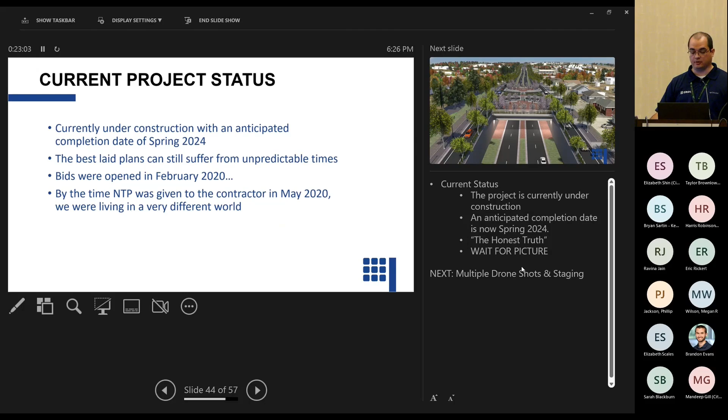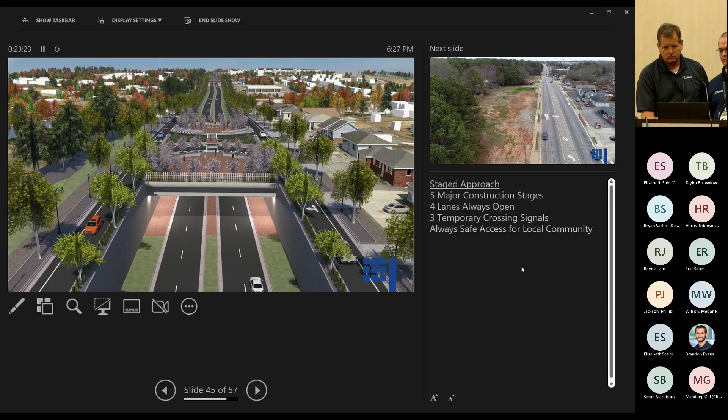Chris is going to tag team this next section with me. We're just going to quickly jump through some current construction shots. Obviously, this was the original rendering, but you'll see we lined it up with some drone shots for you guys to just see how far the project's come along. So real quick, this is prior to construction, after we've already purchased the right of way. City went through themselves and cleared the entire north side as part of their efforts.

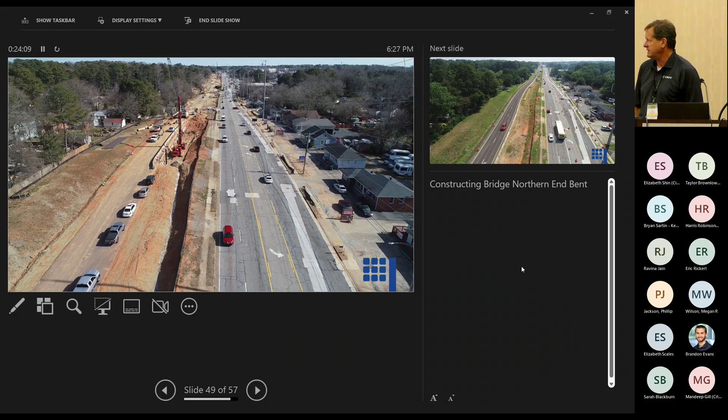Here, we're early in stage 1, working on the local access road plus a lane on the north side there. And you can see here we've got the utilities and water and sewer on the south. Continuing here, this is a little bit later in stage 1. As well as here. And one of the interesting things here, they're already building the end bent for the bridge right there. I don't know if this pointer's going to see it. Yeah, right there. It actually kind of gets buried during stage 1, then it'll get uncovered as we get into stage 3.

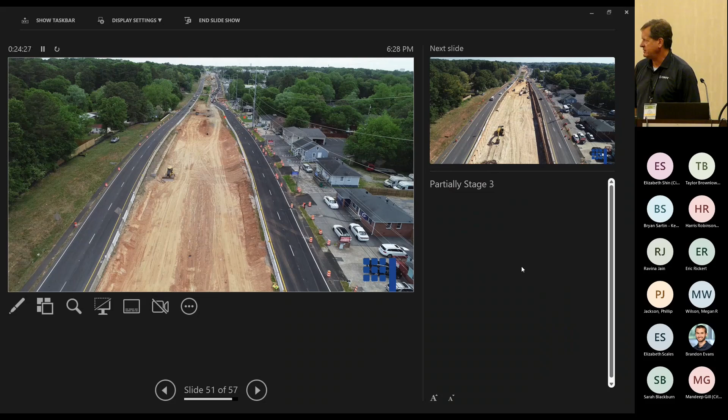So here's the end of stage 1. We got vehicles already shifted on this half permanent, half temporary paving there. We've moved vehicles on the south side, and now we're fully working on the south side. Here we're basically in stage 3 now. Vehicles are on the outside and we're starting the big dig. As you see, we're coming down. We got soil nail walls going in. Here, there's the end bents going in.

Getting deeper, you can see the walls are in now, the end bents. The project's really coming along at this point. I think this is today. Yeah, this is just last week. We've already got the wall panels going in on the soldier pile tieback walls. So they're putting in the panels at the bridge locations first, then they can bring in the beams and keep working on the rest of the walls.

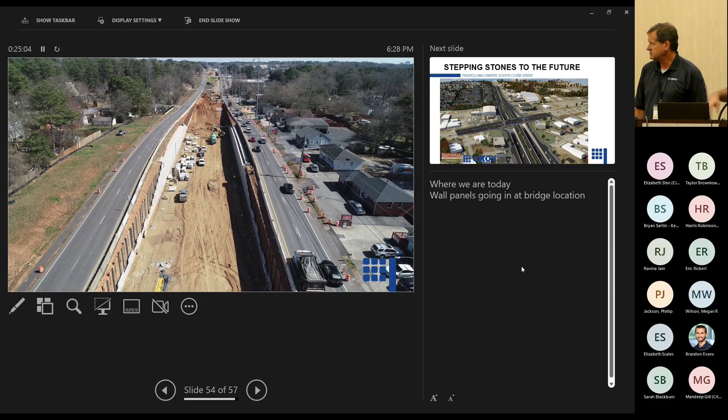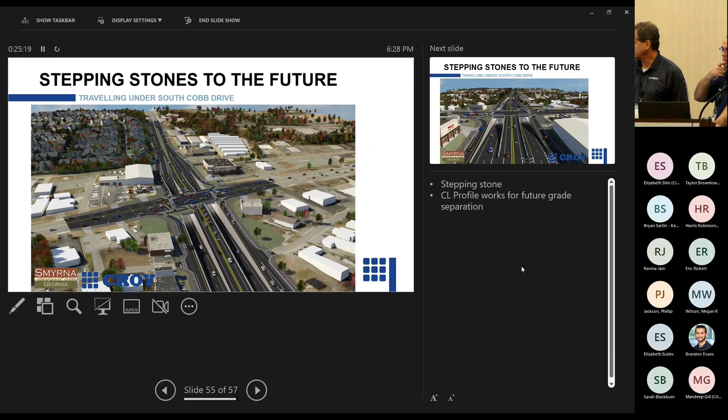So I mentioned this is a stepping stone project, right? Our west limits come up a steep hill to South Cobb Drive. I talked about the profile. This is actually a rendering of that future grade separation that we did for GDOT a couple of years ago. This is looking east here, and you can see in the distance, real tiny at the top there, our two bridges. Stepping stone project, it's just going to keep going forward, and eventually some of you in this room may even work on the one that they're working on at Windy Hill and US 41.